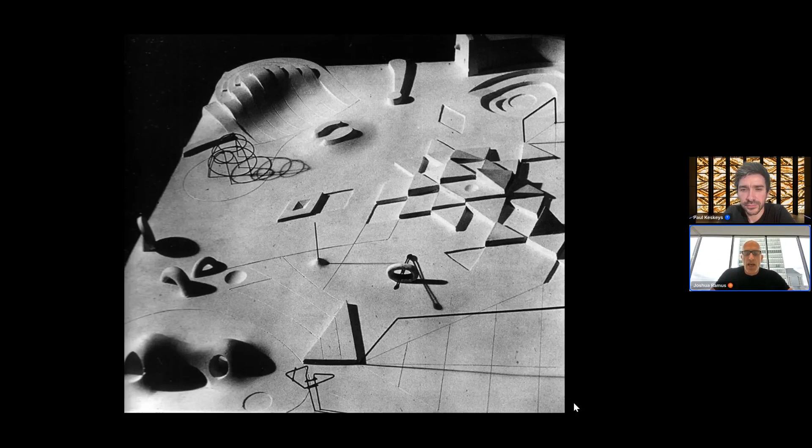And that's more along the lines of the idea of flexibility I want to advance within these performing arts centers, and I would argue really with any other kind of typology. And so within the performing arts centers, we've labeled this new way of thinking—we call it presets.

Presets is an idea that asks: what if we were to provide a series of high-performing, very different presets, each one that, in the case of a Performing Arts Center, has excellent acoustics, intimacy, and sightlines. We know how much time, money, and staff it would take to move among these presets, and we believe the institutions' creative power will figure out ways to push these off-center and make deviations within them. This idea of presets starts to cover the full spectrum of possibility and potential, and that's the underlying theme of the three projects I'll present.

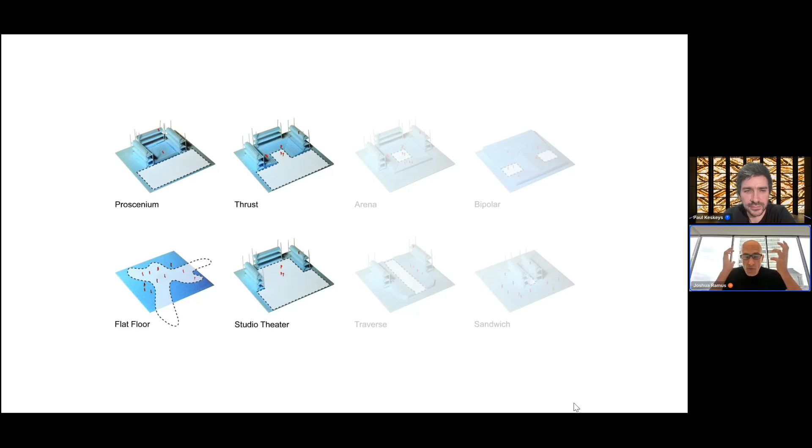These are the four preset configurations we worked on, designed so they could move between them quickly with a limited number of stagehands and known timing: proscenium, thrust, flat floor, and studio theater. But idle hands are the devil's workshop—we were also working in the background to figure out how they could take those tools and deviate from them. We created configurations like Arena and Traverse, which are well known, but we also invented our own, bipolar and sandwich, just to see how far we could push this set of infrastructure.

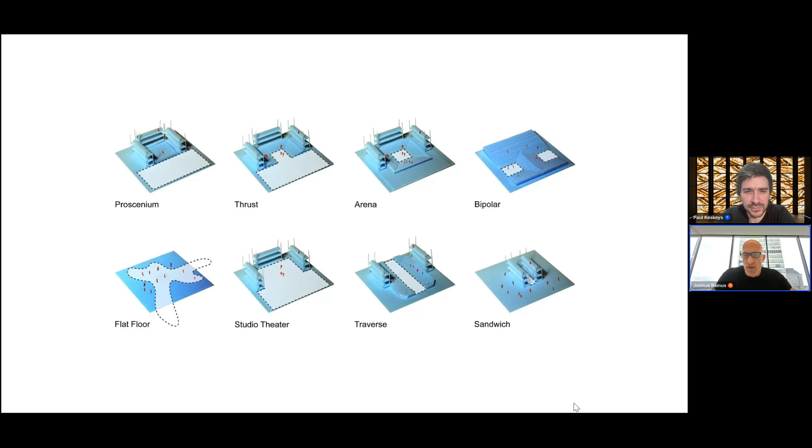I'm going to show a video of it transforming, and I'll say something over it: in the first four years of operation, they did 28 shows in 25 different configurations. Remember, we gave them 4 presets—so the power of this approach, the idea of presets engendering incredible flexibility, is that if we gave them 4 and they ended up with 28 shows in 25 different configurations, that means they invented at least 21 configurations themselves.

And so this project actually verified our idea about flexibility, about this idea of specificity and presets actually engendering more flexibility than a blank slate. So here you see the auditorium.

So this is end stage, this is thrust, this is, I don't know, they created movable seating wagons that they rolled all around the space to do The Wiz. This is Henry IV in God knows what configuration. You can see that basically the stage and the seating were completely intertwined. And it's an important theme that I have to state, which is all of this mechanization is dumb.

So here you see the massive proscenium. It was probably about 28 tons that we had to move out of the space. And we always tell our clients when working on these theater projects, do not beta test, do not come up with new technology. Figure out ways of using known technology in novel ways. So the way we were moving the balconies and the way we moved the massive proscenium is actually through a scoreboard lift. And why a scoreboard lift?

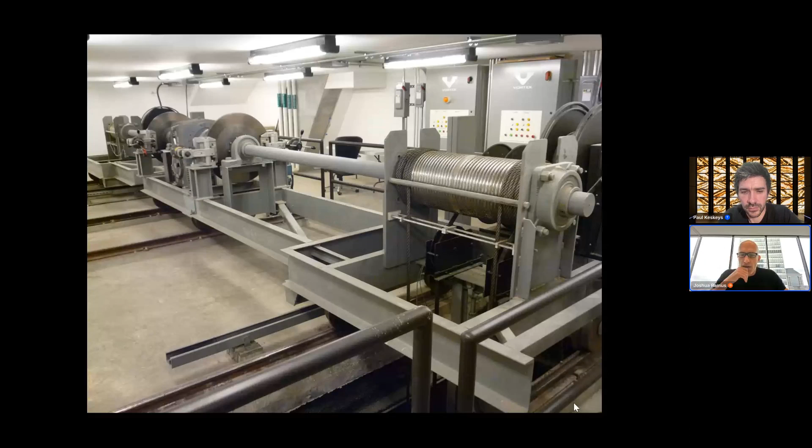Because right down the street is the American Airlines Arena. There are scoreboards there. If they can't move the scoreboard between when there's a Dallas Mavericks game and they have the Ice Capades, you can imagine how much money they're going to lose. And so this is a piece of technology that is tried and true, it's warranted. And there's also someone over there that can fix that one, who can also come immediately over here and support any kind of repair on this one.

Similarly, the way we are reconfiguring the floor, the seating, is we took technology that's more associated with the stage side of opera houses and we applied it to the seating side. And so this is a theme that I'm going to come back to throughout today's presentation. We like to call it dare to be dumb.

So the second advantage of the stacked theater design was that it actually allowed the artistic directors to control suspension of disbelief, right? If they want to allow Dallas into a performance, they can do so in the last act. Like if in Macbeth, you want to have the parable of Macbeth applied to everyone's daily life, you could lift the curtains and they could see Dallas, but without hearing it.

It also had a huge unanticipated advantage, which is that it allowed the public to see the creation of art. Right? It allowed the public to see the building of scenography, the blocking of scenes if the artist allowed it to happen, and so forth. And on this lawn, it has become standard that people will come not to watch a performance, but they'll come to have dinner, and they'll set up a picnic and they'll watch the creation of the art. And that's led to a massive increase in the patronage.

So just to give you a further sense of how open the auditorium could actually be to the exterior and vice versa, this is actually a performance that was designed for the theater called Colossal, and it's about Texas football. As the building's in Texas, football is very important. And you can see how they did the entire performance literally with Dallas as the backdrop.

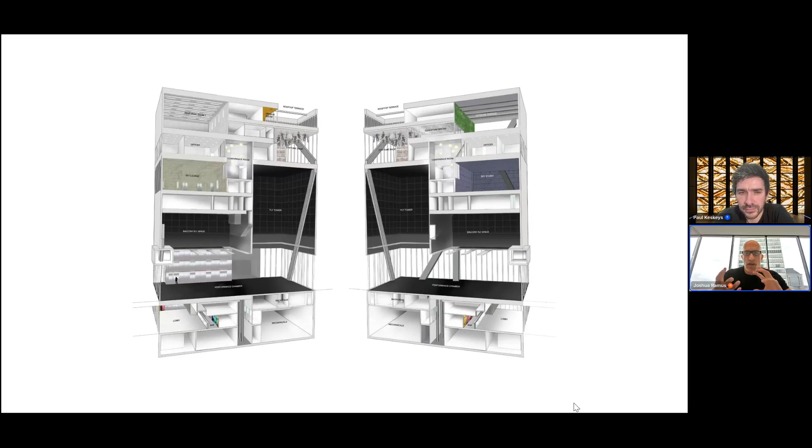And then the last advantage of the stack design is that it actually gave us the opportunity for the entire company, not just the artists to mingle, but also the back of house support, the managerial support, office functions, and so forth. They all start to become blended in that upper stack, right? So this is a kind of lobby space that can also be extended into the black box. This is the black box. You can see on the left what looks like the control booth. It is the control booth, but it is also a meeting space.

for the offices. You see the offices above that look down into the meeting space, that those offices then look into the costume shop. Costume shop has a conference room that looks into the breakout space, the exterior terrace of the main rehearsal space, then the main rehearsal space, which then looks out onto the terrace, and the terrace that looks out over Dallas.

So just to give this idea that there's this constant sequence of these spaces that allow for the company to create cohesion, that the art isn't segregated in one space and the advertising and fundraising is placed in another, but it created this kind of universal cohesion. Okay, so that's the Dallas Theater.

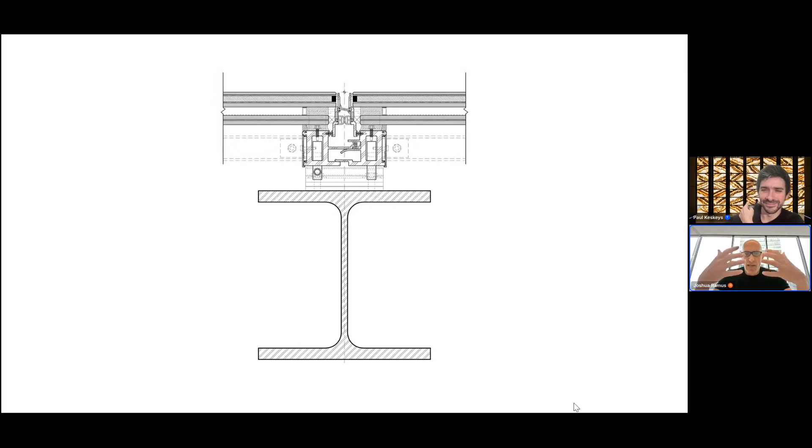And that's done by laminating 12 millimeter thick pieces of marble from Estremoz, Portugal, that have a lot of iron in them, and that's why the building glows this amber color. The iron, the ferric oxide gives it that amber color. And those stone tiles are actually then laminated between two pieces of glass and put into a standard insulated glass unit. And that allows the building to glow from its interior light. There's no special lighting on the facade. It's actually the corridor lighting.

And then during the day, obviously the inverse happens, where the light from the exterior kind of bleeds into the building. It has a really positive impact, particularly on the performance floor, because they can leave all the doors open and they can get natural daylight into the rehearsals, into the performance chamber while they're doing rehearsals or doing tech setup, or they're building scenography and so forth. So while it isn't transparent like the Wyly Theater, it does provide just natural daylight and breaks the hermetic seal that is conventional of performing arts facilities.

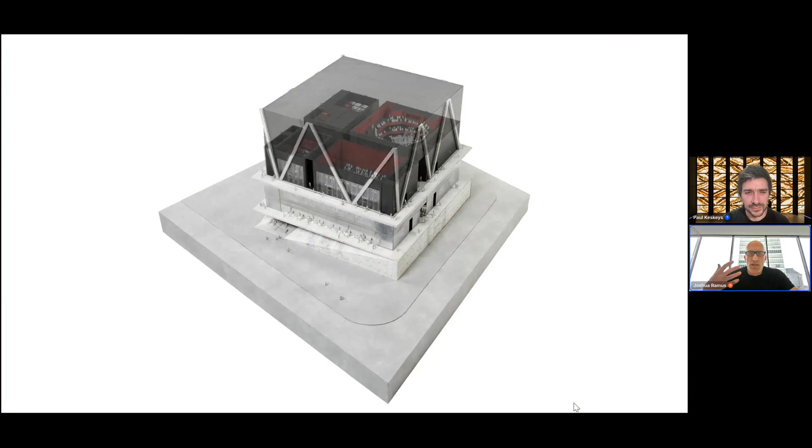So this is the cube. If I'm going to denude it, you see what the whole building is organized around. I'm now going to show it in plan. An L of reconfigurable theaters. Now, ostensibly, there are three, and I'm going to say why I say ostensibly. It's really a system, but there's a large, a medium, and a small. In their natural states, they can house about 450, 200, and 100.

There's then a fourth tiny venue on the upper left that I don't have identified, and that's a small rehearsal space. But the reason I say this is a system and not really three, to be honest, we say three because that was the easiest way as we were designing it and building it to identify where things were to go. But it really is a system in which, through the use of, I'll go back and forth.

You see I'm turning on 4 big, thick magenta lines. Those magenta lines are massive acoustic guillotine walls. 2 of them are 46 tons each, and 2 of them are 23 tons each. And they create an acoustic buffer in combination with those kind of interstitial spaces. And it allows this system not to be 3 theaters, but proportionally for those theaters to extend and to combine into 10 possible configurations. Okay, so now you have a building that isn't 3, it's actually 10 possible proportions.

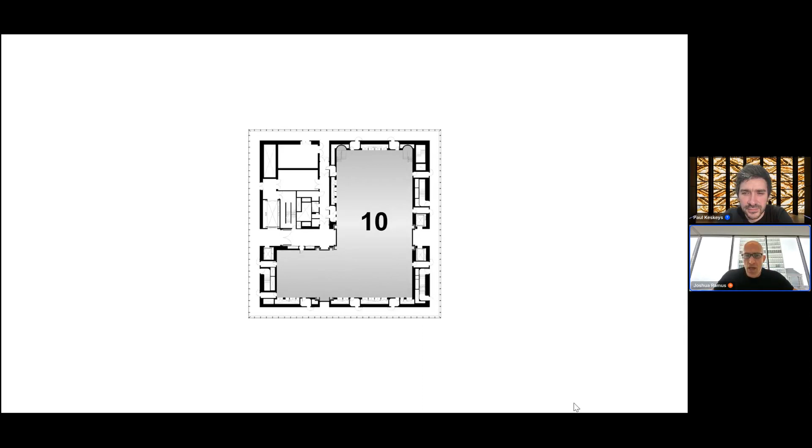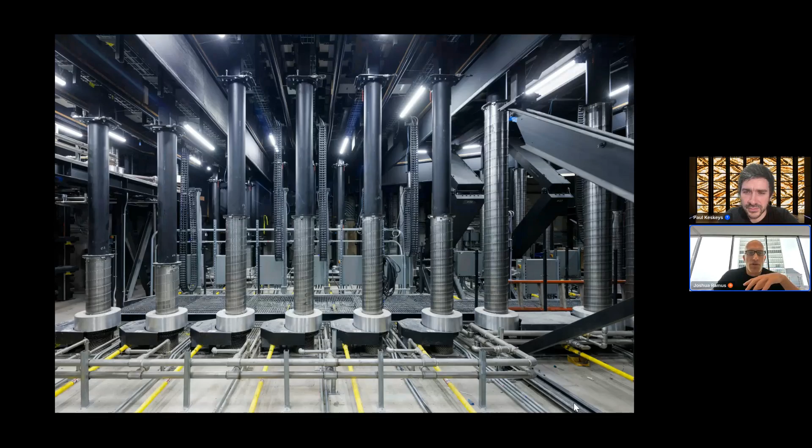And I'm going to go, again, just as I talked about in the Wyly, dare to be dumb, to use known technologies. We're moving the floors. Here, I'll show. Floor systems allow us to create reconfigurable environments within each of the spaces.

This is using a technology that was really originally designed for the movement and control of shipping containers. There are a number of movable balcony elements that are all moved on air casters. Again, that's a really dumb technology. You just need compressed air. There is a series of demountable catwalk gridiron elements, and then a suite of chair systems and rake systems that allow us basically to build an infinite number of sort of chair organizations within this.

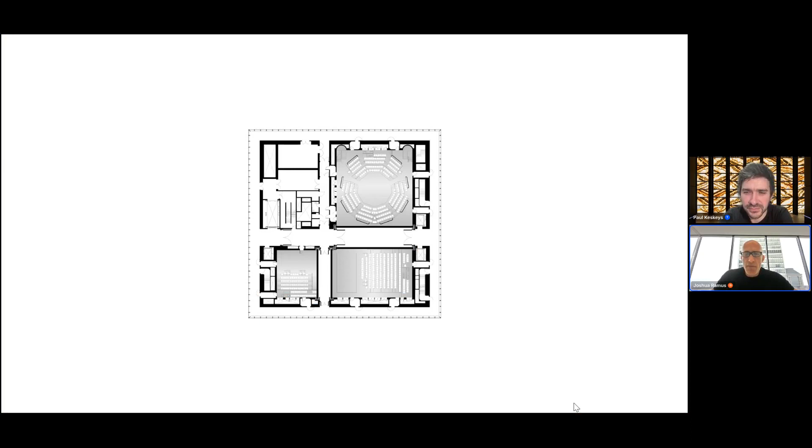And what that means is that within any individual proportion, there are multiple stage audience configurations, and the building, in fact, as of the day we opened, already had 62 possible stage audience configurations for which we had already gone through, I'll say, the building department. The building is sited on Port Authority land, so it's not the building department, it's something called, actually, we won't get to that. But anyway, it already has 62 possible stage audience configurations, and the institution is already inventing more. So again, I talked about how at the Wyly Theater, there were 4 presets and they invented others. We're opening with 62 in this building, and they're already starting to invent new ones.

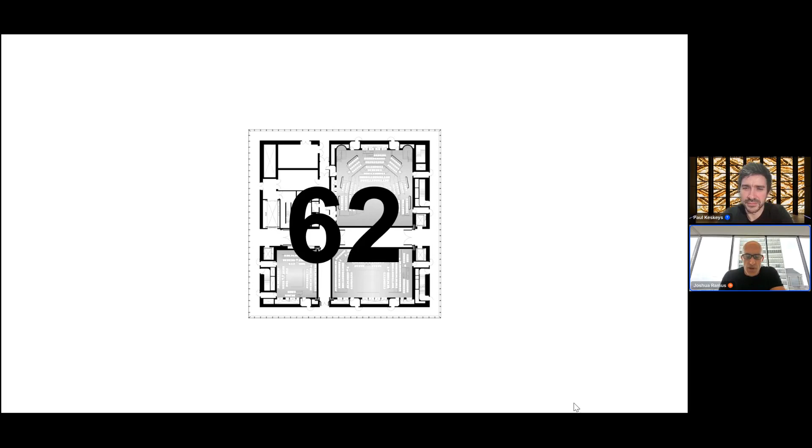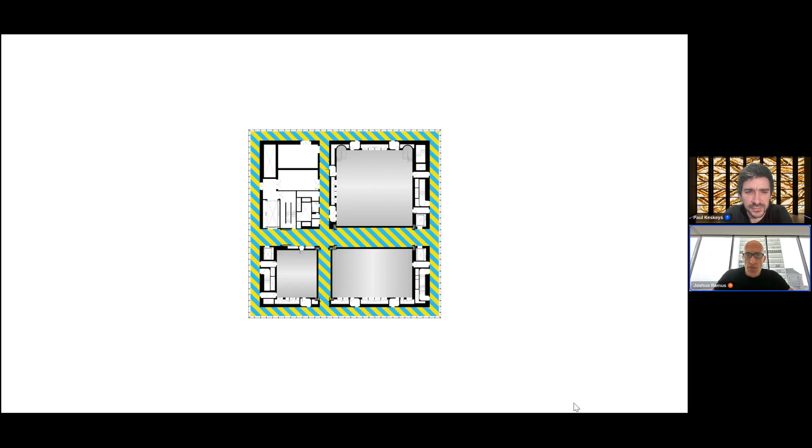I said that when we were looking at the Wyly Theater, we started to realize there was the potential not only to control form of performance, but procession of performance. And so everything that you see in these yellow and blue hashed lines can be defined as either front of house or back of house in order to allow an artistic director to control sequence as well. Let me describe what I mean by that. In this configuration, the public would be moving around the perimeter and there'd be 3 different coincident performances. In this configuration, it's a bicameral configuration where you might have people coming at 7 o'clock on one side to the larger venue and at 7:30 on the left-hand side to the smaller venue.

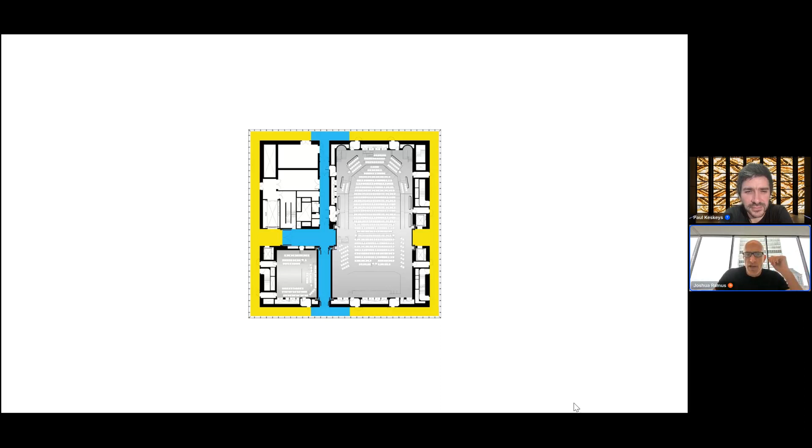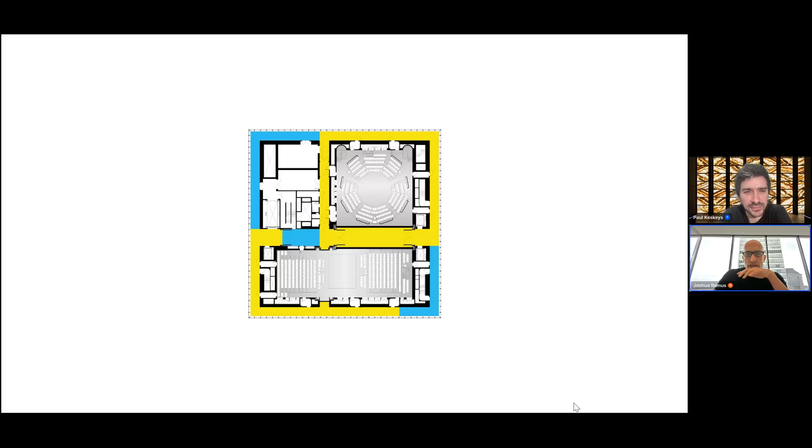In this configuration, the central zone has become sort of a secondary lobby. So let's say you're doing the Tribeca Film Festival here, and each one of the venues is having a screening. You can have a lobby that's in the center. This is actually a really exciting configuration that they've already used, which is they allow the public to encircle an auditorium, sort of like a Wagnerian configuration, and have everyone enter from every side, sort of dogpiling the stage. And then any combination and permutation of sequence and stage audience configuration within those 62.

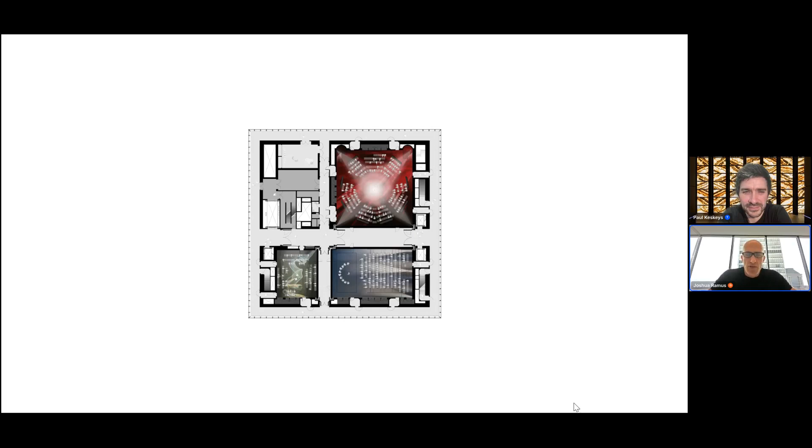And so, if we called the Wyly a theater machine, we started to call this a mystery box or an instrument, something that could constantly surprise the patrons, the public, every time they come to the building. I'll come back to that in a moment. But just to give you some sense of that reconfigurability. Now, because of the mission to have a building that's responsive to the art and not the art responsive to the building, and this idea of having 62 configurations, it's much less mechanized. We had to make a very careful determination of what elements like the floor and the walls would be fully mechanized, what would be partially mechanized, like the balconies, and what would just require manual labor to install. And we had to cut the right balance between those. It would not be possible to fully mechanize 62 different configurations.

Just to give you a sense of the spectrum of things that they've now performed in the space within the first season: the first was Cats, the second was a vocal performance. This is an opera, dance, a combination of really opera, theater, and dance.

Okay, so that kind of flexibility, I've talked about how we resolve it in terms of its physicality, but there's an enormous issue that has to be resolved, which is how to resolve a high performance venue that's changing configurations acoustically. There is a history of these kinds of typologies being good for many things and great for nothing. I will say from the outset that both this and the building I'm about to show have gotten rave reviews for their acoustics across all different kinds of performance typologies. And it comes from basically thinking of the building as a musical instrument.

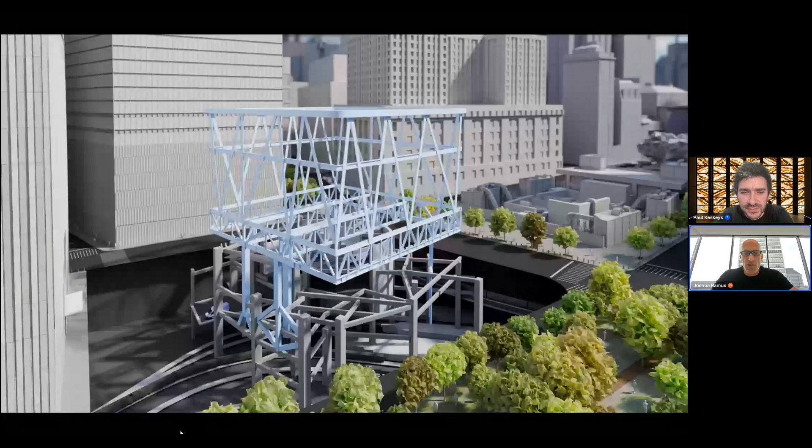So the problem, obviously, is that you're building a performing arts center over something that has incredible vibration potential. But the advantage is that we've effectively made a huge bucket. And in the bottom of that bucket, we have 1 foot thick, high density rubber pads, basically base isolation pads, that allow us to build the 3 auditoria like boxes in a box. That's the technical term. We like to call them ships in a bottle.

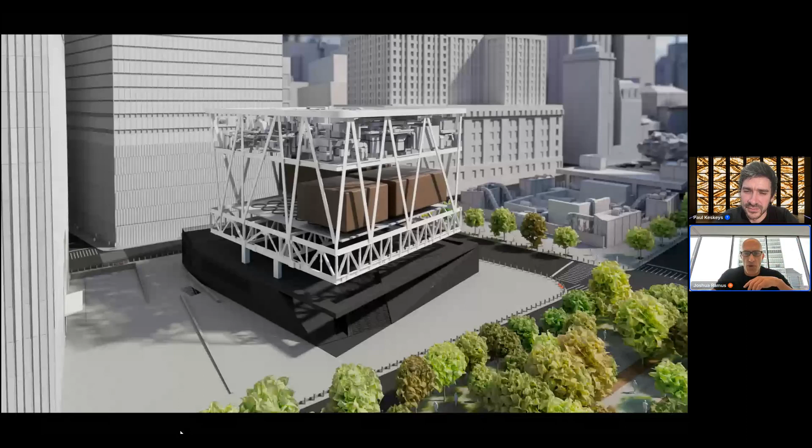And as long as you have any of those 2 massive acoustic guillotine walls, not only do these performance spaces not hear the rumbling that's happening beneath, but they literally can't hear anything that's going on in the adjacent chamber. So you can have a rock concert in one space and be doing poetry, spoken word in the other space. And this led people to ask, when the building was going up, why are you building these little buildings on the interior of the big building? You can see those smaller steel structures in the center. And the answer is because we were building little buildings on the interior of the bigger building. That's literally what we were doing.

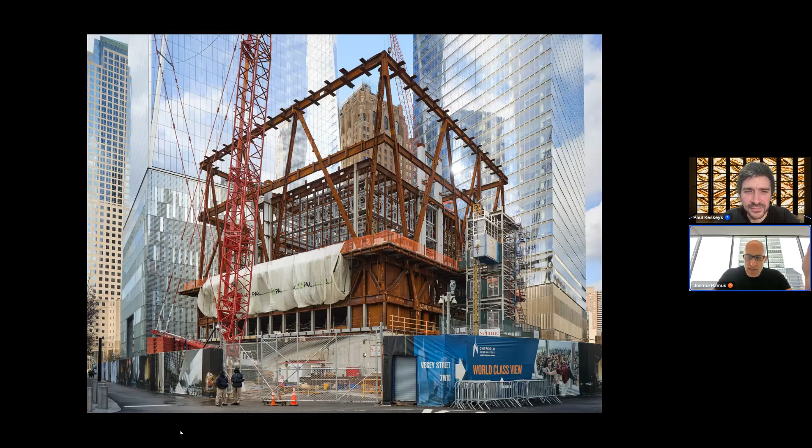And now this allows me to go full circle back to what I said in the beginning about creating a pure, elegant shape in reaction to its context that we started to call the mystery box. I think most architects think of creating complex buildings that they say reveal themselves to the user over time. We actually wanted to create the inverse. We wanted to create a building that seems incredibly simple, and that every single time you come, you have a radically different experience. And the more you use it, the more you don't possibly understand how all those experiences are happening within this one relatively small structure.

That idea of the mystery box actually is a tool, and I'll talk about three of them, that historically architects have used to create suspension of disbelief. And it's not only through theaters, it's also through religious architecture. If you think about the things I'm about to say, you will also see them in churches and mosques and synagogues. So the first was this idea that you go up, you process up into the building, right?

This kind of elevation. I should say that people ask why we did this. As I already said, all of the trucks enter the back of our building. So that first 21 feet, that first 7 meters, that's literally not our building. We designed it, but that's all infrastructure of the Port Authority. And so we necessarily had to process people up into the building to get to the lobby level. But that idea that you raise up into the building, that's one device for creation of suspension of disbelief.

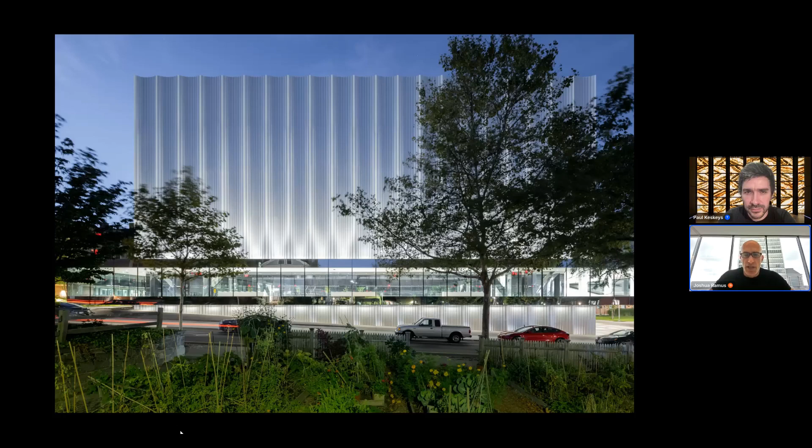And so with that, I'm going to now transition from the Perelman to the last, which is, just check the time, yeah, the Lindemann at Brown. And again, I'm going to give you the context of the project first. Starting in the mid-teens, 2015, 2016, Brown created something called the Brown Arts Institute. And the idea is that they wanted to embed within the arts all the other disciplines on campus, and they wanted the arts to become embedded within all the other disciplines on campus. And so they wanted to create a building that would basically be a laboratory for hybridization and interdisciplinary arts work.

And they sited it on something called the Walk, which was the connector between the old Brown campus and the old Pembroke campus that got combined. And so basically creating a new artistic heart to the entire campus because this was land that they had available. So they've actually built two new facilities. One was done by Diller Scofidio about a decade ago. That's the Granoff, and that was more of a true lab, arts lab. And then ours is the performance facility that is directly across the Walk.

So to give some background, Brown, for being an exceptional university and having exceptional arts, really didn't have exceptional venues. And they saw the need for creating a dance space, a small ensemble space that was sort of like a cave space with ambisonic sound, like what you're seeing on the left. But they also had this very real need to have a high performance symphony orchestra space. What you're seeing on the left, it's well known how you can create that space. In fact, the Wyly Theater is effectively that, right? It's a highly reconfigurable space that can do many different kinds of arts typologies.

But the outlier that seemed to make this feel impossible was how can you actually combine it with a symphony orchestra? It basically had never been done. And the reason for that is that symphonies usually have 1,800 to 2,400 people. They also have an enormous amount of acoustic energy. There's simply no way to take that kind of space and volume and close it down so it would have intimacy and excellent acoustics and sight lines for an intimate theater or a small ensemble space, a recital hall.

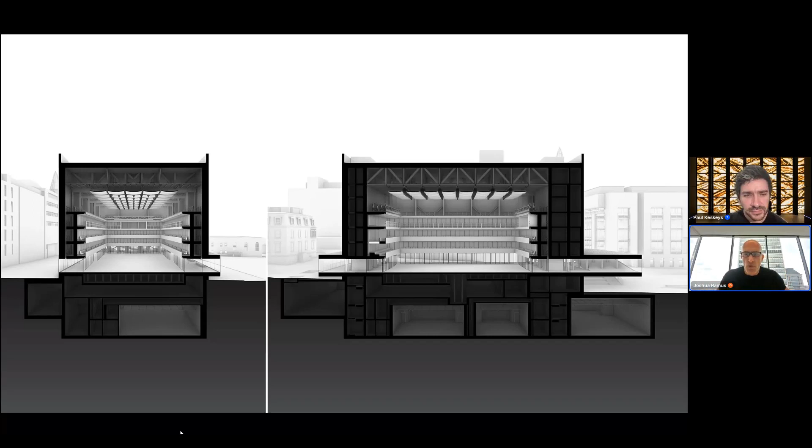And the long back and the side walls, these here, you'll see them here, are actually separated in 2, and they can transform independently of each other. So I'm going to go from the inert configuration, and you'll see that the back walls and the side walls come in, and the ceiling comes down, and this creates that kind of multimedia cave space.

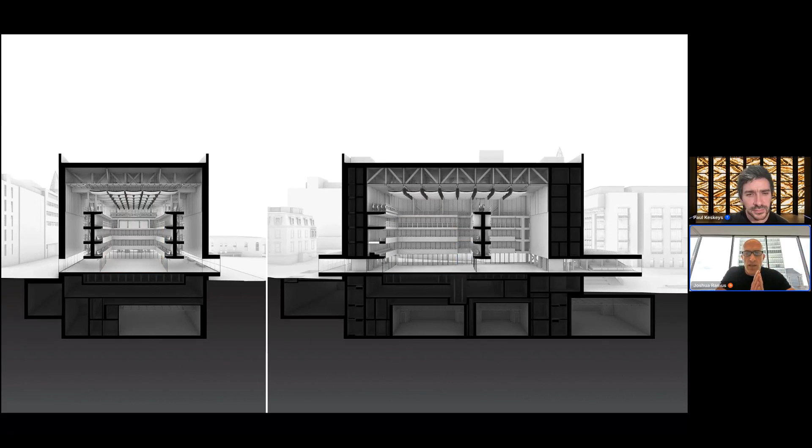Now, the next one is all of the side walls come in. The floor changes its rake, and the ceiling comes down to create a configuration for... I'm getting tired.

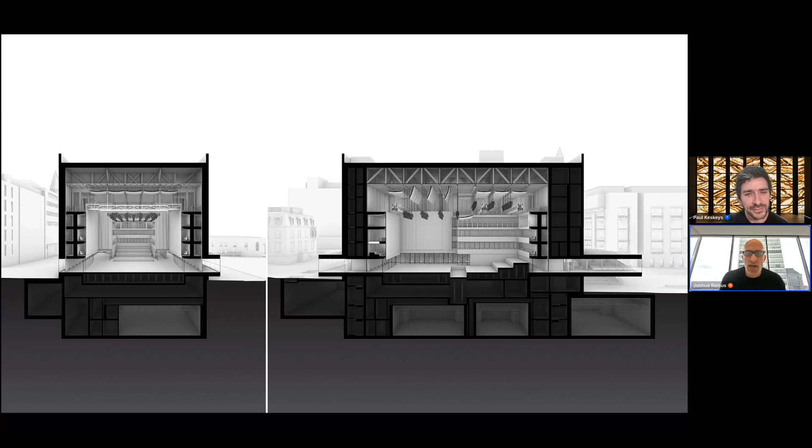...for a recital configuration. And then going into an end stage theater and dance, side walls go out on the stage side to create side wings. Acoustically, you don't really need the ceiling except for one small element. The seating creates a more steep rake.

And then finally, everything moves out to create the symphony orchestra configuration. Again, the ceiling, although it seems like it's not taking much of a shape, that shape is actually incredibly important to the high performance of the auditorium.

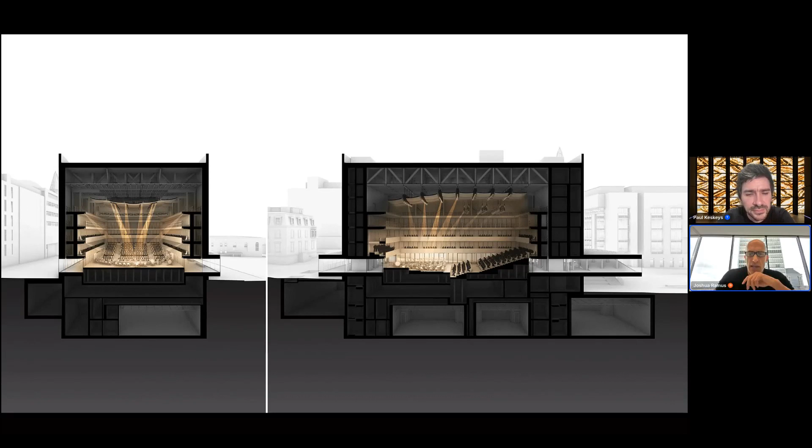And then lastly, it goes back to that kind of inert space in which you can basically do anything, a big flat floor, Armory space where you can do banquets and large format art.

So this is the hall itself. And if we called the first one the theater machine, the second one the mystery box, this one we really have always called an instrument, that it is tuned really like a musical instrument. And so here you see the media, recital, theater and dance, full symphony orchestra configurations.

As I said, this one is the most reconfigurable. It's the most push of a button. It is, frankly, the most reconfigurable theater in the world. It still, however, requires stagehands, so it is not fully automated, and that's important.

But it has basically lasers throughout the entire thing. So as things begin to move, if someone were to put their hand between something, the whole building stops. If you were to pull out any kind of safety element, again, the building stops. So it's a super intelligent instrument.

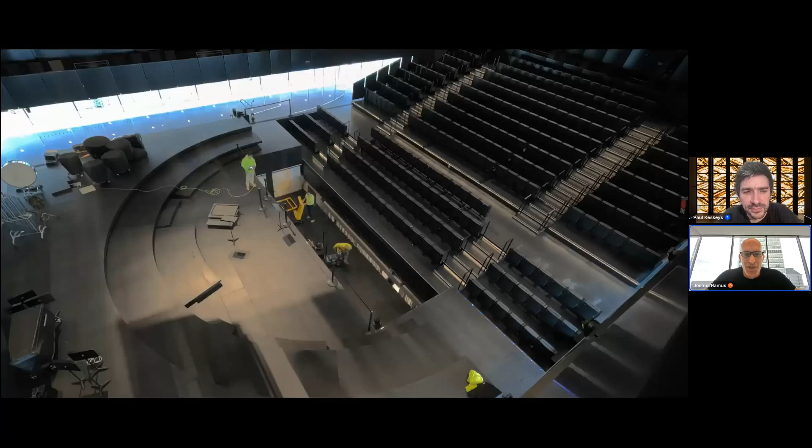Now I'm going to show its reconfigurability. This one's a little longer. I should say, each one of these time-lapse photos, we always do them while the building is just finished construction, and we're still trying to figure out how to do it. So they always show lots of people running around. This can now be done in a limited number of hours with a really limited number of stagehands.

But here you see the sidewalls coming in. It's creating the theater mode. That's deployable acoustics, so they can control the absorptive or reflectivity of the space. And this is the most important thing. You should see the acoustic reflectors, how we can literally change the volume of the space, and they can take really any configuration. I'll come back to that in a moment.

Here it's going into the recital configuration. Now it's moving back out, I think, into... no, it's going into the media configuration.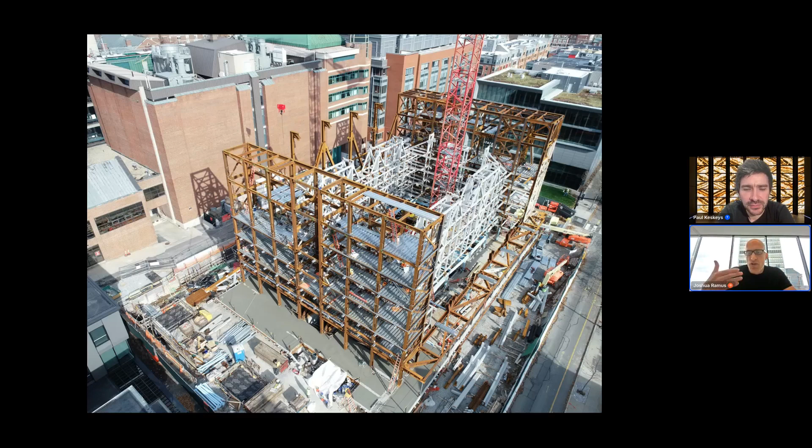All right, so the way we achieve this, the building—I'm going to keep coming back to the word dumb—the building's dumb. I don't mean it's easy to do, but it's dumb. It's a big bridge. There's two piers, just like a bridge, and then steel spanning between it, and you can see that the white elements, these are the gantries. They're just hung from the bridge structure, and that's how these gantries...

These are the ARPs. They are the thing that most changes the acoustic signature, along with the deployable absorption or reflectivity that's on the sidewalls. Again, super dumb—we just used the technology that, if you're watching the US Open or the Super Bowl, the cameras are zooming around the space using guy wires.

And why do you know they're safe? Because you can imagine what would happen if a camera broke off and injured people as it raced around watching Tom Brady throw the football. So we know they're fail-safe, and we used the same system to control these 48 acoustic reflector panels. They can take any geometry you want, each one individually, but of course we're trying to make orchestrated configurations of them, and we can do anything.

So in this case, just for fun, we dropped them all down 8 feet off the floor just to make an 8-foot sandwich. So you see how we can control not only the acoustics, but also the spatial experience. The building becomes a totally tunable environment.

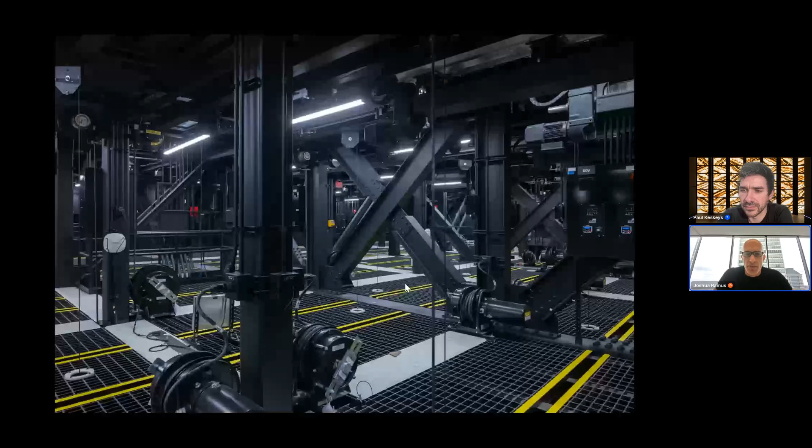And then there's a whole host of other mechanized elements and a continuous grid system such that students can actually get up and work on lighting, work on scenography, and so forth without having to go through OSHA, because there's a continuous grate at the top of the building so that no one can fall.

There's no hazard. Okay, so I said I was going to come back to this really important moment on opening night. Itzhak Perlman performed a piece with his full symphony that has a really amazing, beautiful cadenza. And he is the virtuoso you think he is.

The cadenza was extraordinary. But he said before the performance, when they were rehearsing, 'Look, historically I never know what to do with this piece, because the space either is great for the symphony and then I'm too quiet when I do the cadenza, or the space is great for me, but then the orchestra just blows the space out.'

It's too loud. So during the performance, right before the cadenza, we literally took the ceiling and adjusted it in real time—it has no sound whatsoever. The building literally was an instrument that changed its tuning on the spot. It can take about 5 seconds for these things to deploy.

And it went from being a space with the energy of the full symphony to, when he did his cadenza, suddenly you could hear his fingers moving up and down on the fret. Afterwards he said, 'Look, I've never had this experience where I felt like the building heard me, like the building was responding to me and doing what I wanted it to do.' And I guess that's the potential of these kinds of building instruments.

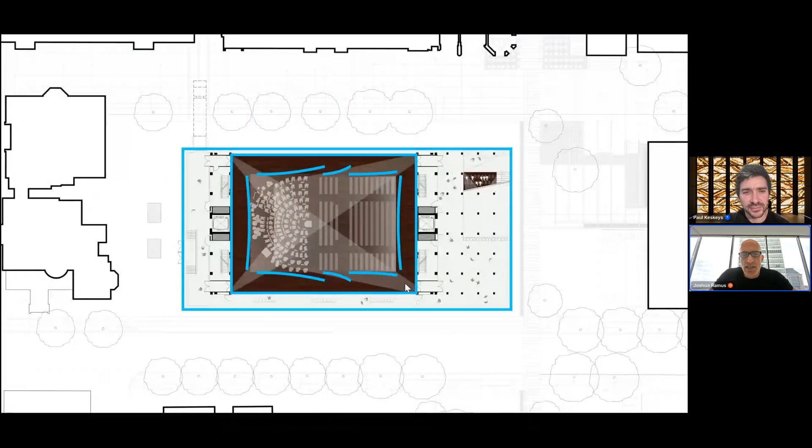So it looks like the facade just kind of goes straight through the building. There's a misconception that glass is a terrible acoustic material, when in fact it's a great acoustic material for dampening sound because it has different thicknesses, densities, and interlayers, so it cuts out a lot of sound.

What's interesting is within the first 8 feet of a performance space, you want a lot of reflectivity—you want high frequency sound bumped back out into the space, and glass is great for that. So having an 8-foot tall glass zone actually improved the acoustic performance of the space. It didn't come at the expense of the space.

Let me describe what the three different lines of glass are doing. The outboard layer is a standard insulated glass unit, which is great for cutting out a huge amount of sound.

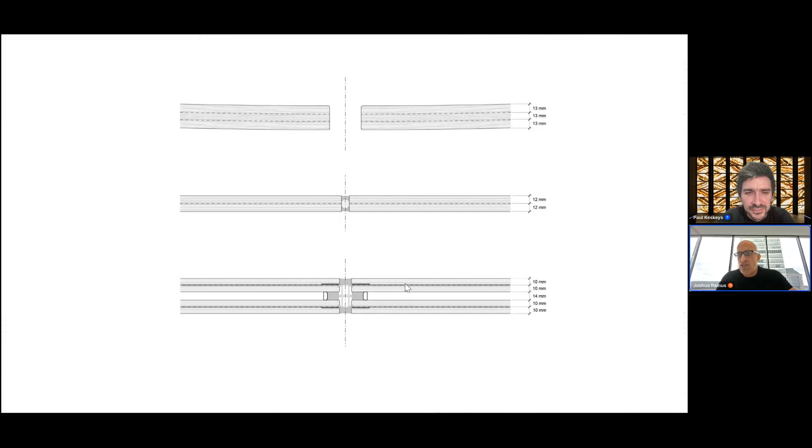Then there's an air cavity, a walkway that runs around, then a laminate of glass—a thick laminate that defines the chamber's acoustic geometry. That's the middle layer: two 12-millimeter lites laminated together.

And then we shaped the ground level at the first 8 feet with really thick arcs of acoustic glass, and that was to pump that high frequency back into the space.

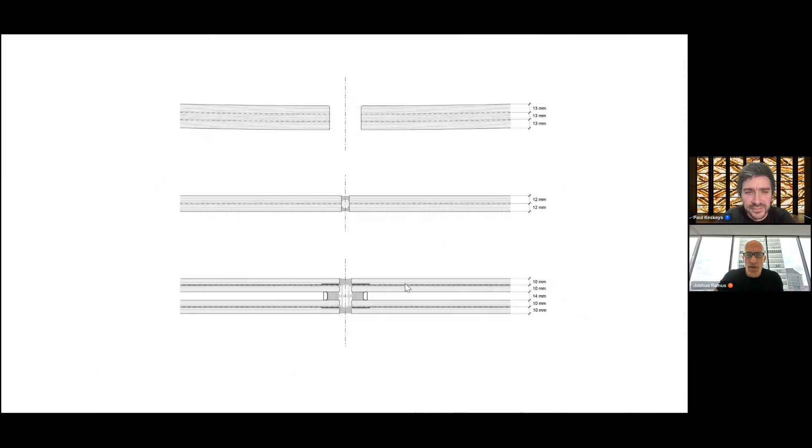And so the end result is this: you have this incredibly transparent ground level that allows literally the art to bleed out and the public to bleed in, and all the other investigations to kind of come into the building.

I'll just quickly end by showing, as an aside, we went bonkers with a motif—looking at Lincoln Center, a very similar architectural palette that each of the architects worked with, but they each carried their own motif. We took this idea because we were doing a contemporary building in Providence.

Obviously we weren't going to do a building that looked like the buildings around it, but we wanted it to play nicely. One of our observations is that these older historic buildings had a lot of relief in them, so we created a lot of relief—it's a bit of a pun, with how columns...

The Greeks used fluting as a way to hide that they were making vertical things out of horizontal pieces of marble. We did the same thing here: we had these extruded aluminum elements, and we hid their horizontality by having the fluting.

The fluting has 7-foot wide flutes, then it's subdivided into smaller flutes, and flutes within the flutes. We carried that motif throughout the building, very much learning from Lincoln Center.